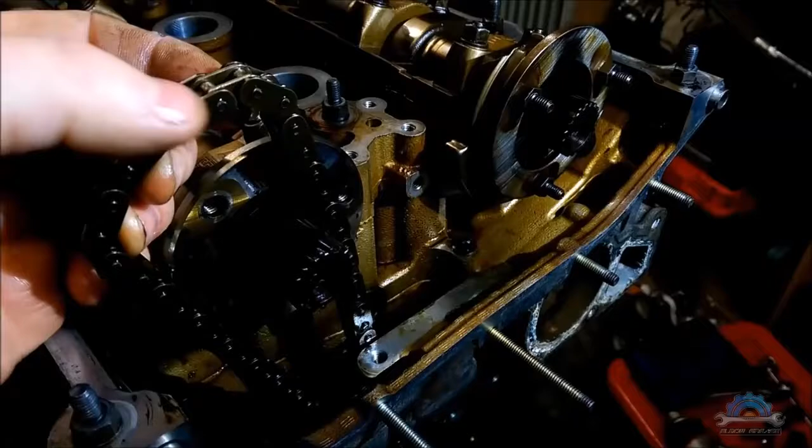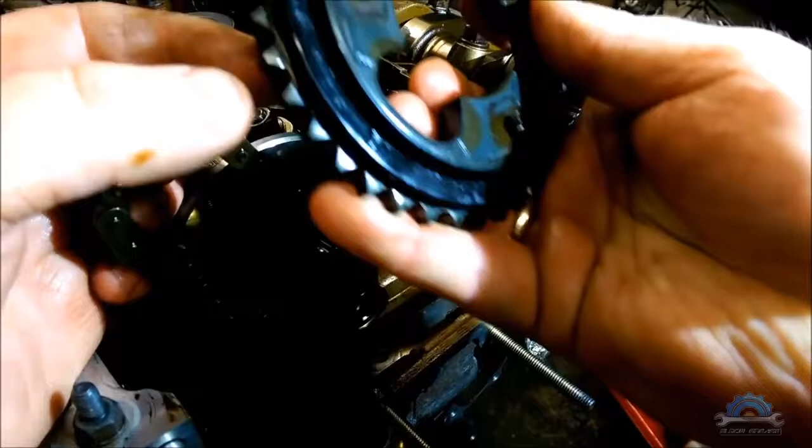Okay, when you put the timing chain on the camshaft, first sprocket is the big one with plastic inside, and there's an arrow on the side. This arrow needs to be flush with the left side of the cylinder head, so 90 degrees.

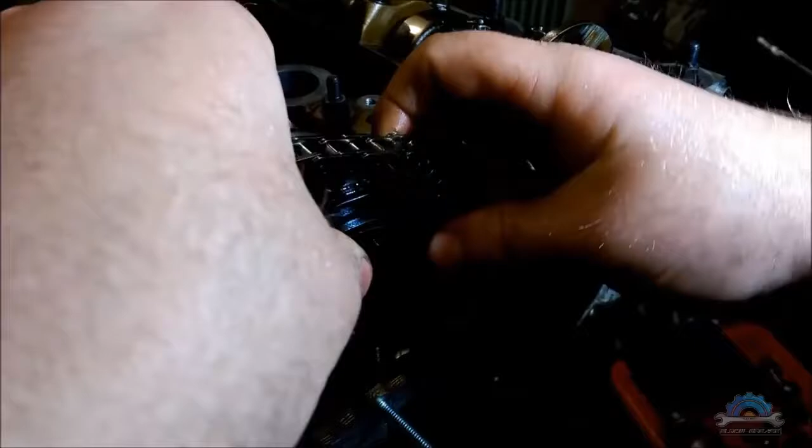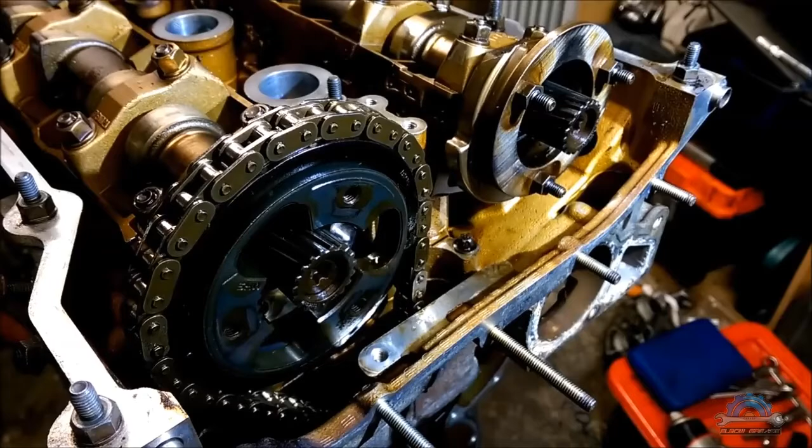But before you fiddle with the arrow, you need to make sure you have all the tools you need for the VANOS and for the timing. Actually, first tool is a camshaft locking tool. You need to lock two camshafts so they cannot move at all. Make sure this is tight.

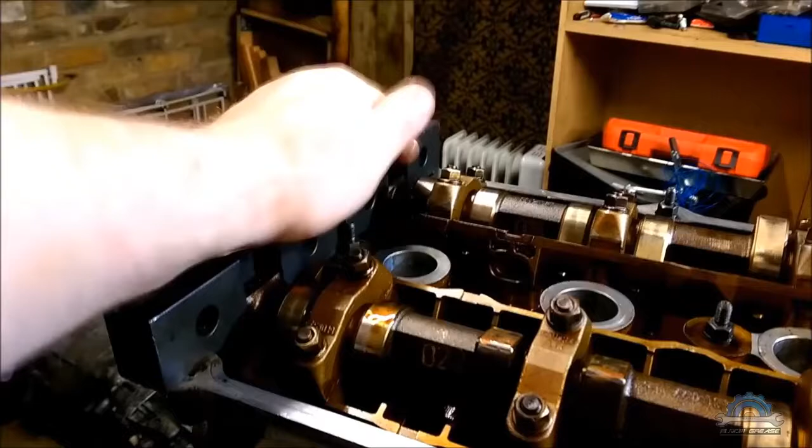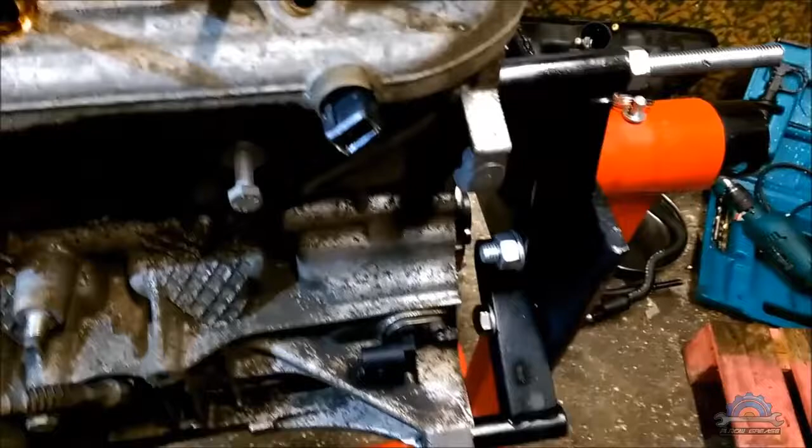It sits on the cylinder head, and then you can proceed with another tool, which is the crankshaft locking tool, which is that pin. But we have a problem here because we don't have a flywheel. And there's a hole for it, which goes through here and locks the flywheel. But the flywheel we have to take off because otherwise the engine won't be on the stand.

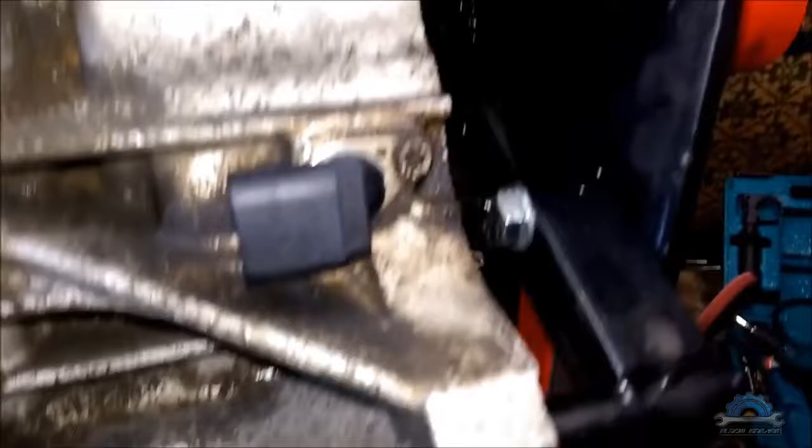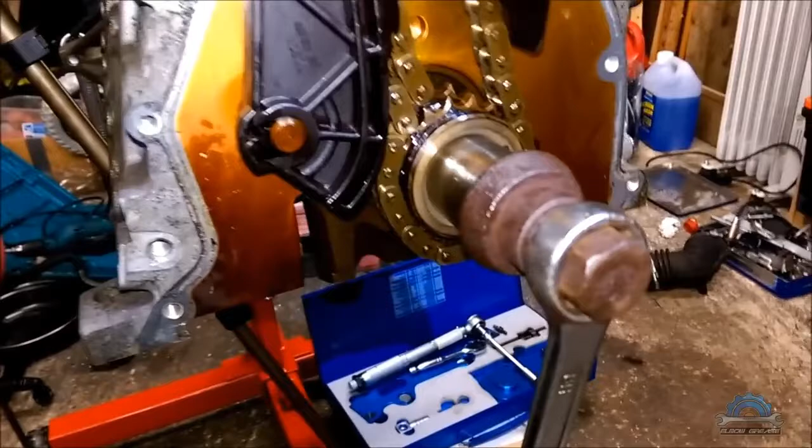So what you need to do, you need to have your timing cover. I'm not doing this with the timing cover because I want to show you more bits inside, but when you're doing this with your timing cover, I'm gonna show you in a minute what you need to do if you don't have a flywheel on the back. This is what you're gonna do.

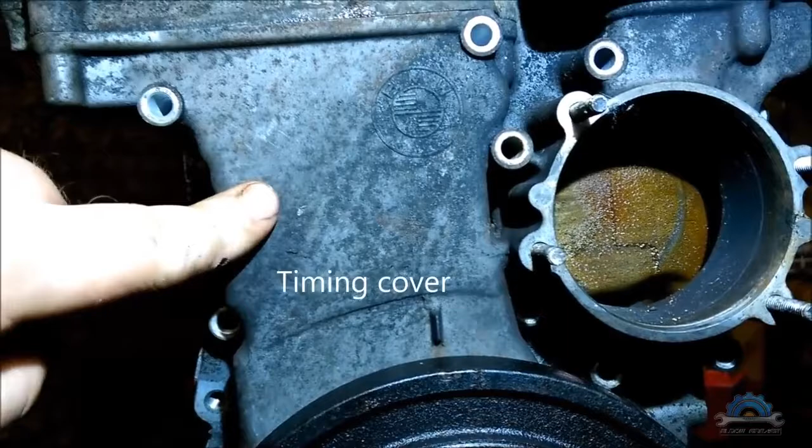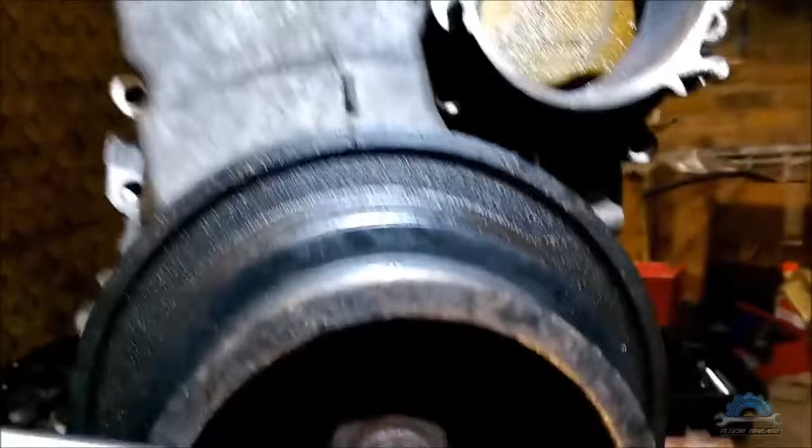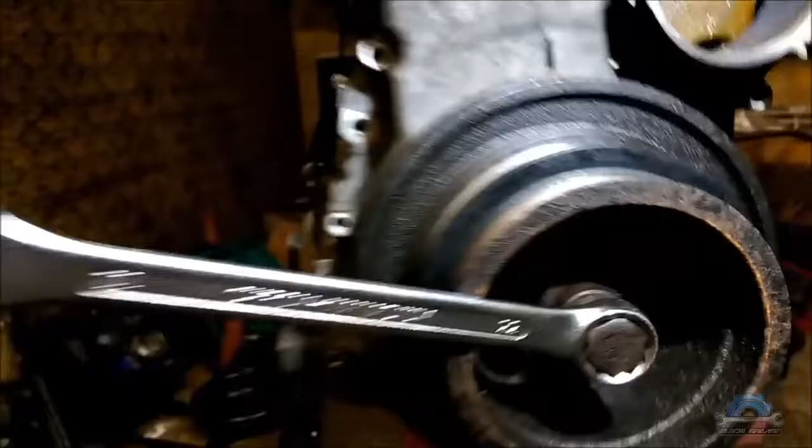You're gonna have your timing cover on in the first place anyway. I just did it to show you where the mark is. That's the mark on the timing cover. That's the mark on the crank pulley. So you need to make sure these are lined up. So that's gonna be top dead center, and then when you're at top dead center, you can align this arrow with this edge. So as you can see, I got my arrow flush with the cylinder head.

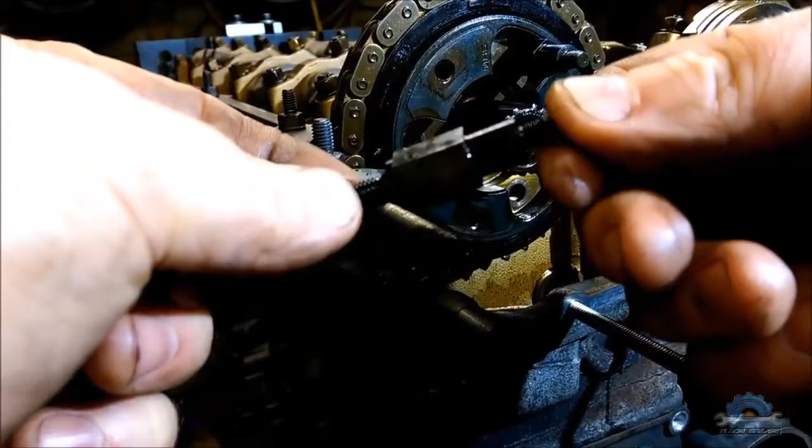So now you're gonna install 3 of these stop bolts. You can put them the wrong way because they are not symmetrical. That round thing needs to be facing out. And be careful not to drop anything inside. The best thing you can do is put some paper towels in here.

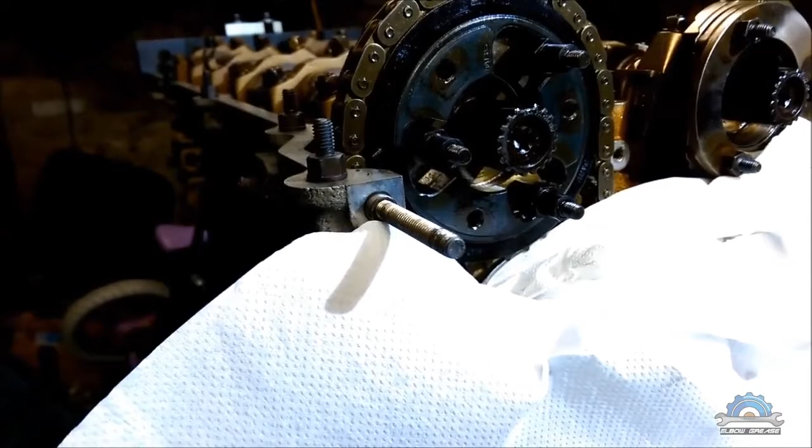So next thing you want to do is install your secondary chain tensioner. I said before you have to do all these 4 Torx, but no, you have to do 2 on the side, and these 2 holding the tensioner. So these 2 on the side first, and later these 2. Excuse me about that.

But now I'm gonna remove this one because it's holding the lower timing case, because I wanted to show you how it looks from inside, so I'm gonna remove it. And now what you need to do is install the secondary timing tensioner. It's 4 bolts.

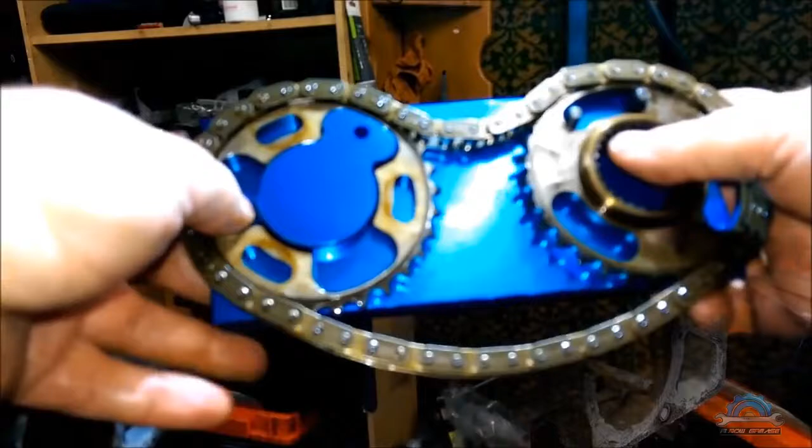To do that, you need one of the jigs from the VANOS tool, which can help you stretch and match the teeth on the sprockets. So as you see, you can't actually adjust it now, so you need to go back, and now it's ready. So what you do, you need to take the setup off the jig and put it on the camshafts.

Next, timing wheel, we can call it. It's gonna be this one. And then you're ready. Secondary timing chain. It's gonna be fiddly, but

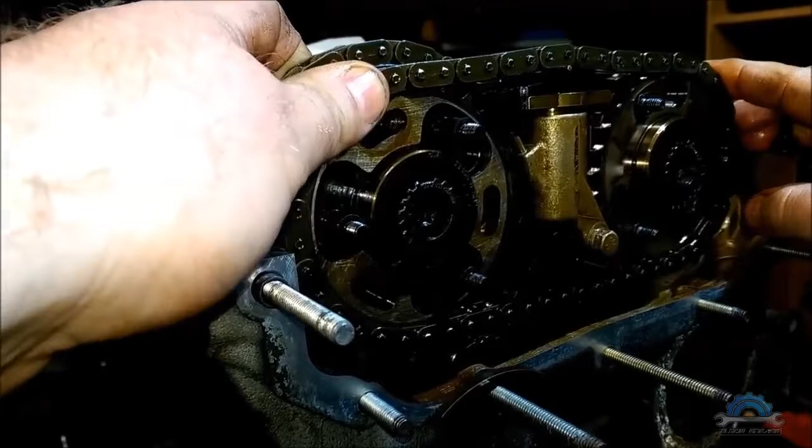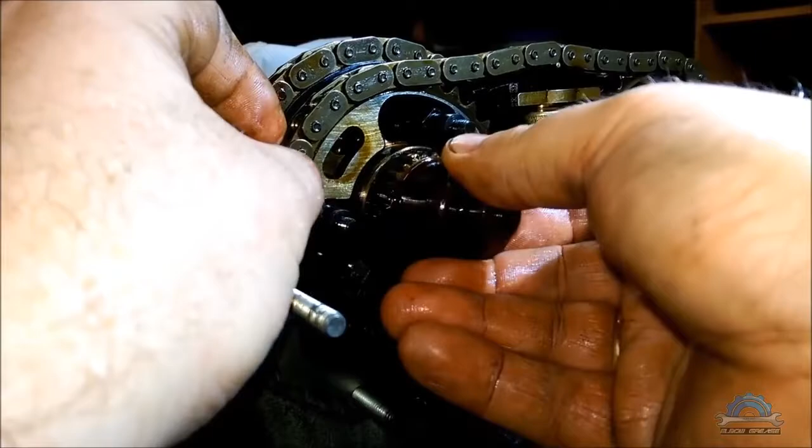each of the camshafts has a wider gap at some point. This gap must be close to the gap on the sprocket. So if it's not, you need to rotate them so they can fit, otherwise you're not going to be able to insert these splines. So they are close, so you will be able to do it. If not, you need to figure out how they're gonna go, and then you can insert them.

So as you can see, I have a good spot, and it's in. One is in. Okay, there's another one.

Okay, so I installed one of the tension plates, which is on the intake side. It says front, and 3 nuts. Now 3 Torx bolts. Not too tight, just finger tight, because that's gonna be torqued down later when you're gonna set up the timing.

And then spring plate, and timing wheel with the arrow facing the same cylinder position, I mean that edge of the cylinder head, same as the first wheel we did.

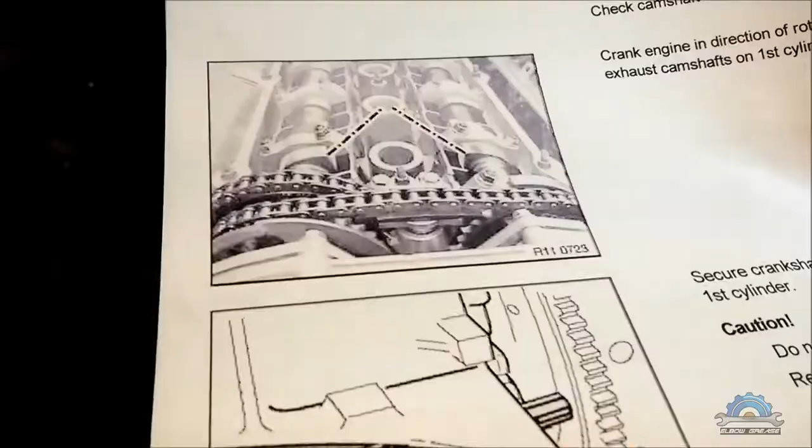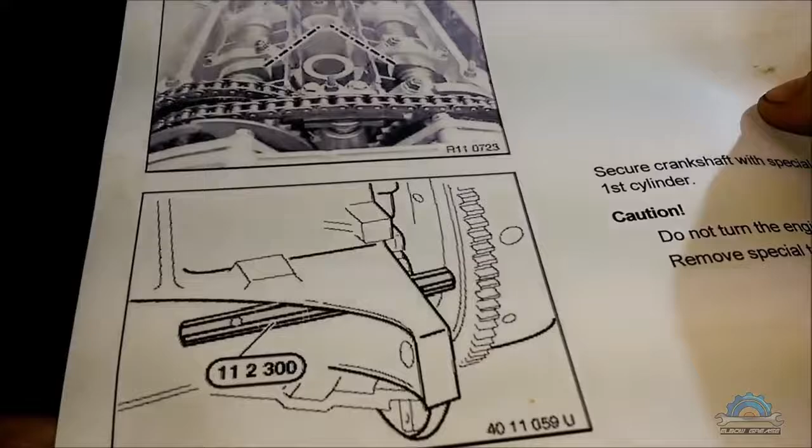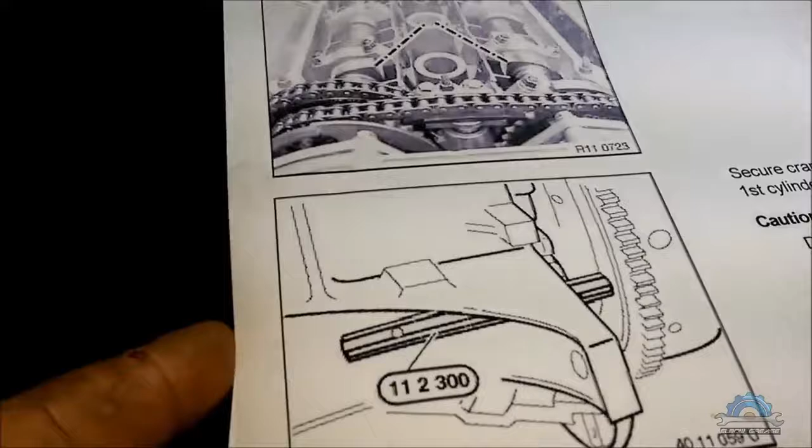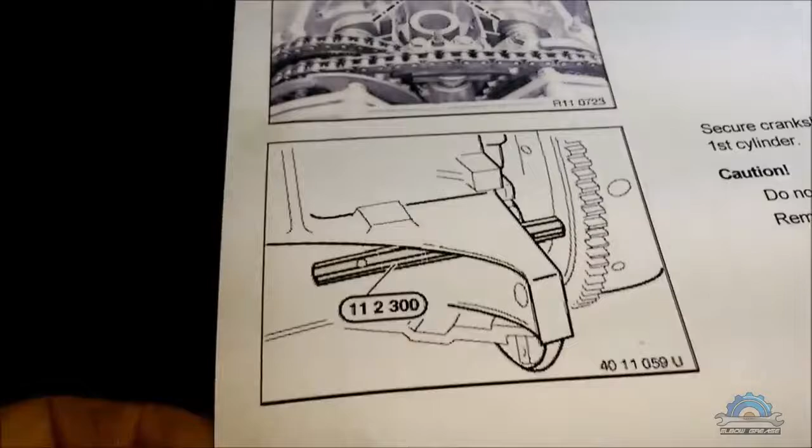Okay, so now I have a manual with me. I printed it out from the internet, step by step how to do timing adjustment, or camshaft adjustment, they say. You can print this out. I'm gonna give you a link for that. But this is how to adjust it when the VANOS and everything is on the cylinder head, so it doesn't show step by step how to put all the sprockets and bolts and everything on.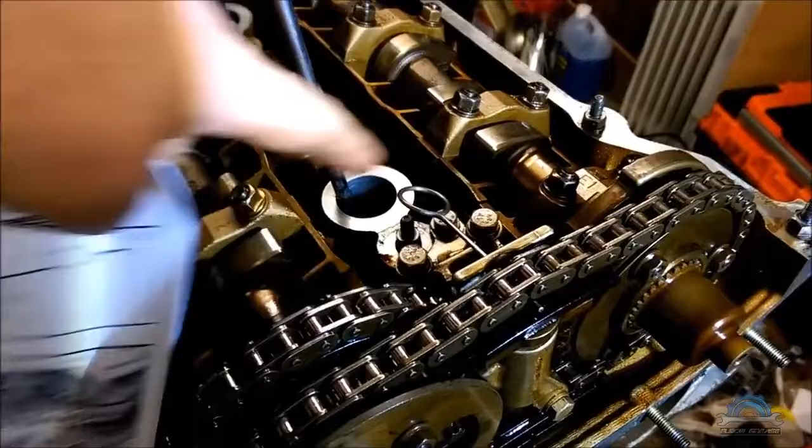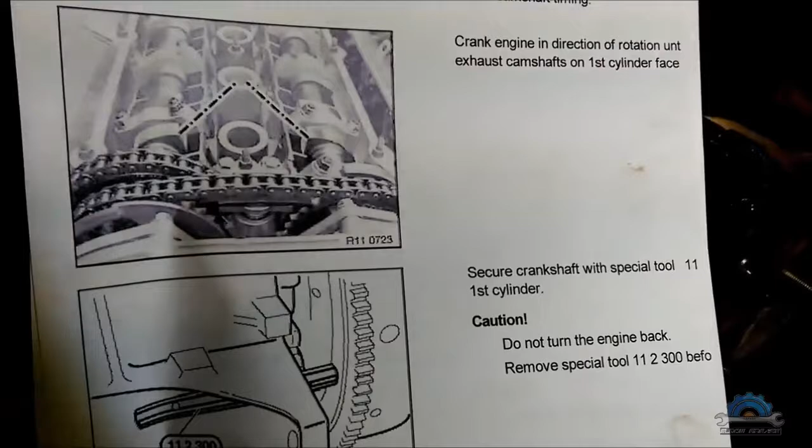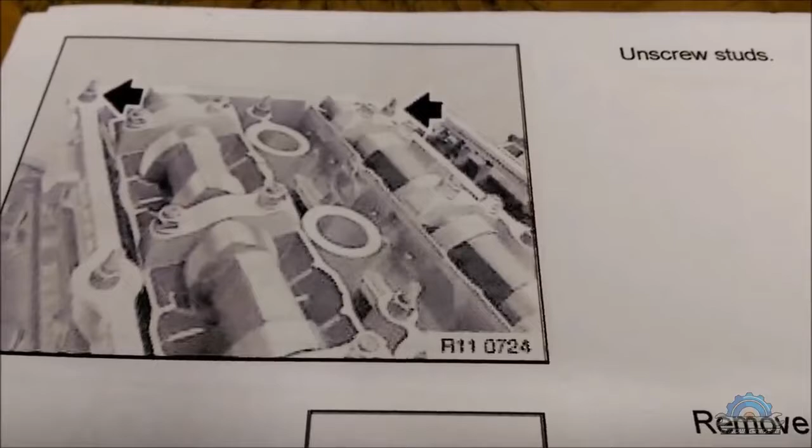Two lobes, intake and exhaust, facing each other. So that's what we have here, if you can see. Then lock the crankshaft with the flywheel. We don't have a flywheel, however we set top dead center with the crankshaft pulley. Now unscrew the studs on the end of the cylinder head. That's what I did before, and I also installed the camshaft locking tool.

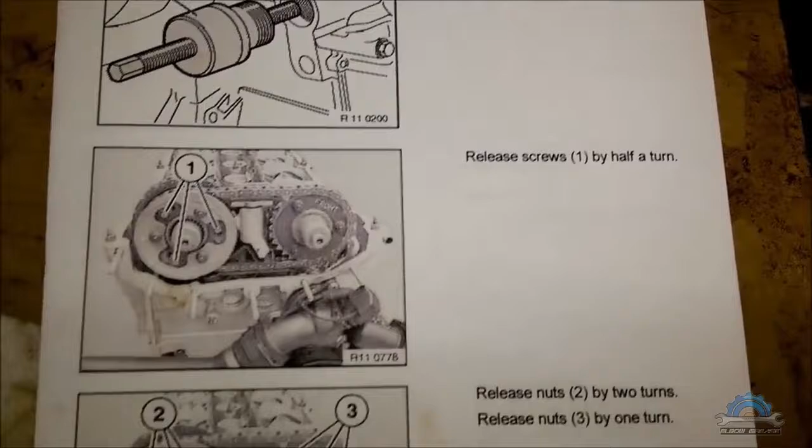Press down the secondary chain tensioner, cylinder for chain tensioner piston. Remove the cylinder for chain tensioner piston. That's what I did, and I inserted a tool from the VANOS kit already.

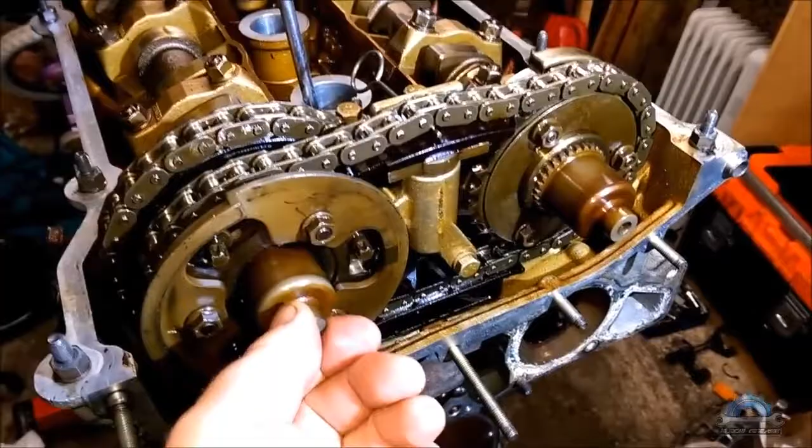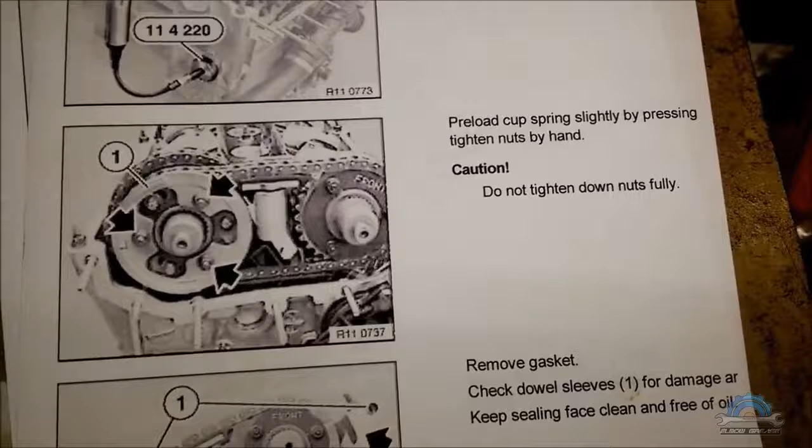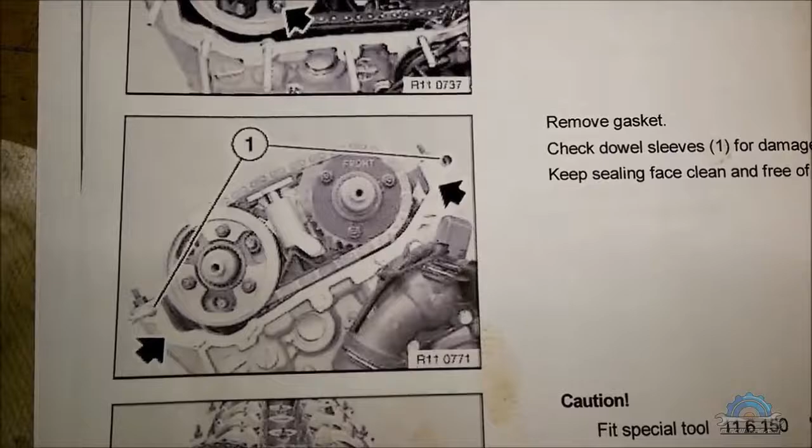It's shown here. We did this. It says release screws. We didn't release them. We didn't tighten them because I was putting back VANOS from scratch. Release nuts. Pull out the splines, they are out. Okay, preload the tensioner rail with special tool, adjusting screw with special tool.

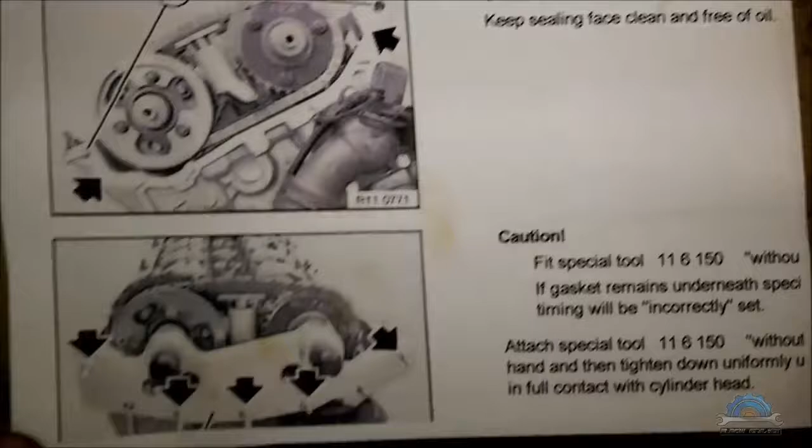Now, very important, remove the gasket, if you haven't done it before. So no gasket if you're doing the jig. Caution, fit special tool. That's the jig. That's what you're gonna do now. Okay, the jig is on, and screws. Very important thing.

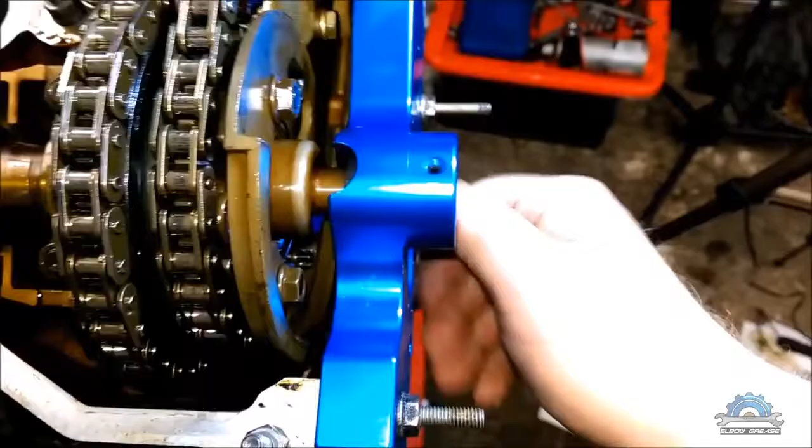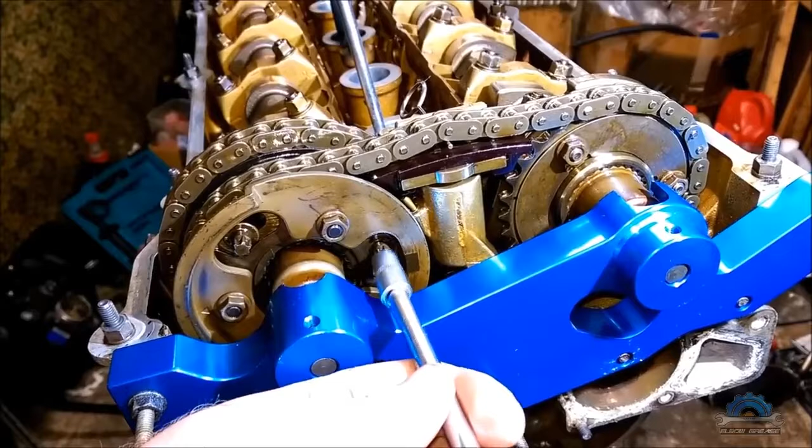When you're tightening this down, you can't have any gap between the splines and the tool. If you have a gap after tightening down, you can't proceed further. You have to go back. You have to pull the splines back so they're touching flush with the tool. It doesn't have to be very tight because you're gonna feel resistance straight away. You can finish with a spanner or socket if you like. Remember, no gasket between.

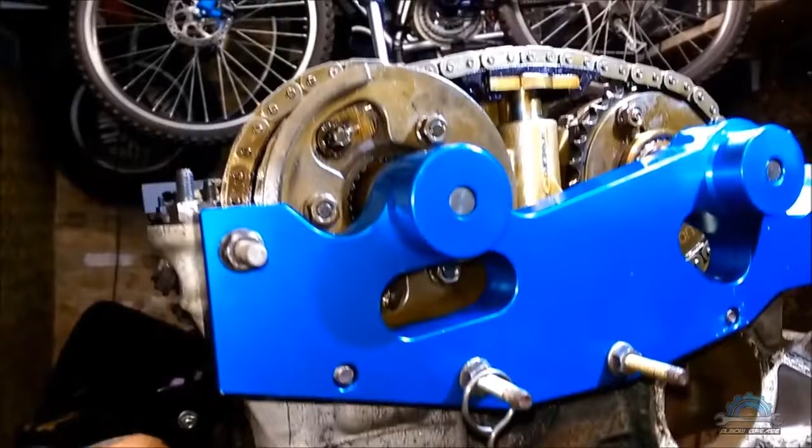When you have your jig on and it's secured, you can pull out the pin. And now, very important thing, I'm gonna show you. That's why I didn't put the timing cover on. If you can see, there's slack on the chain, and the tool is here. We don't have the special tool, which is very hard to find. If you find one, it's very expensive for the job. BMW says they need 0.7 Newton meter. That's actually nothing.

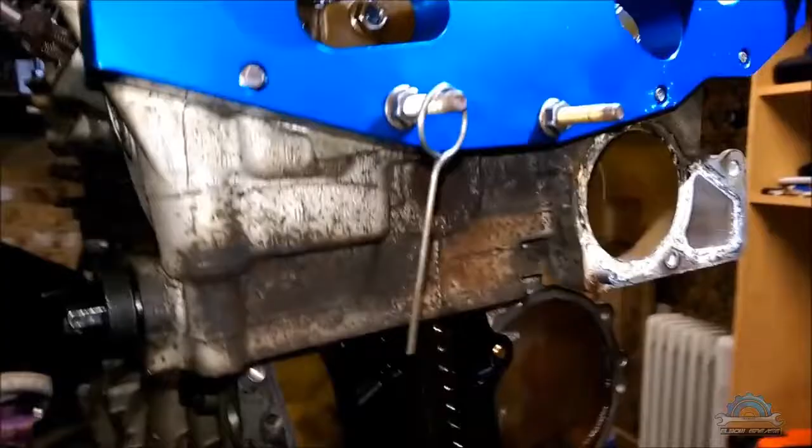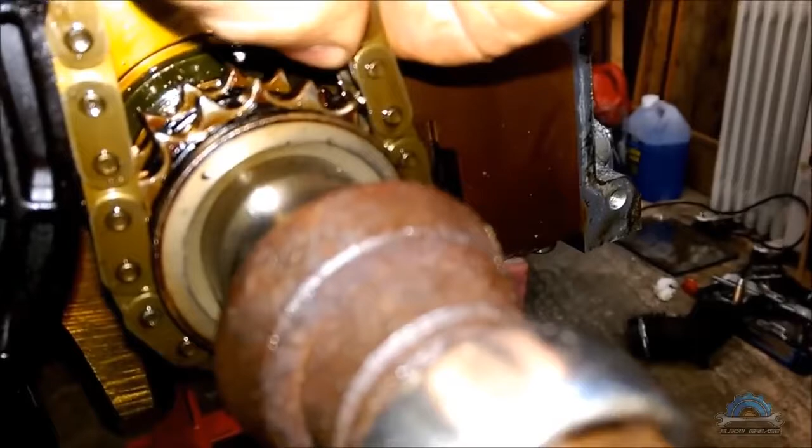I was trying this a few times on my M54 and it works good. What you need to do is just use your finger. If you rotate this by finger, you can see the slack is going off. We don't have tension in here, it's like preload tension. So when I turn this by hand, the slack goes away. So guys, my recommendation is just use your fingers, finger tight. As you can see, there's no slack.

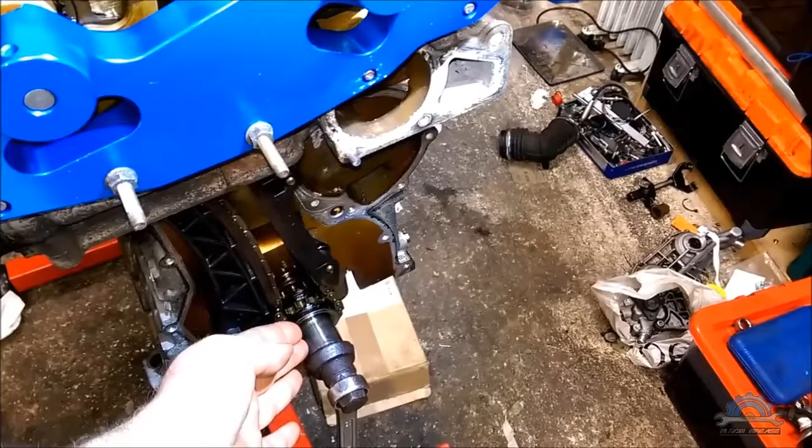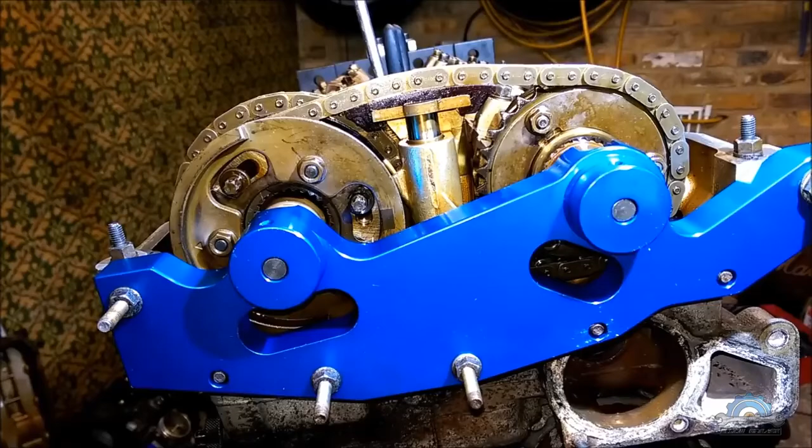The camshafts are locked. We have top dead center. You're gonna have a crank pulley in here anyway. If that crank pulley moves, you can stop, go back, adjust it again. That's how I did my M54. No problem with that. Computer showing each angle is fine. And now you need to tighten everything. We're gonna set this torque wrench for 10.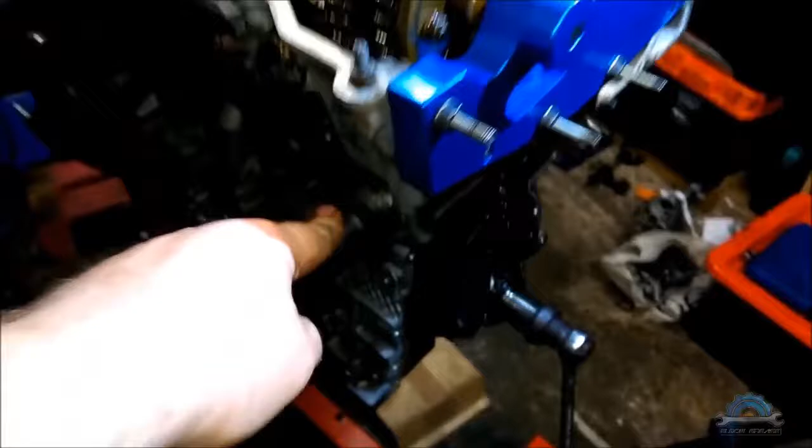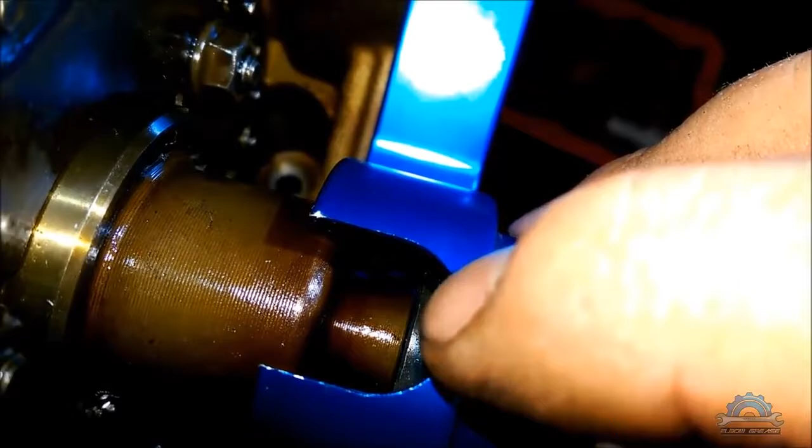Now you can remove the tension tool and you can install the tensioner itself. If you feel it's faulty, if it's compressed too much, you have to replace it with a new one. This requires 17 Newton meters. You just need to tighten this quite good.

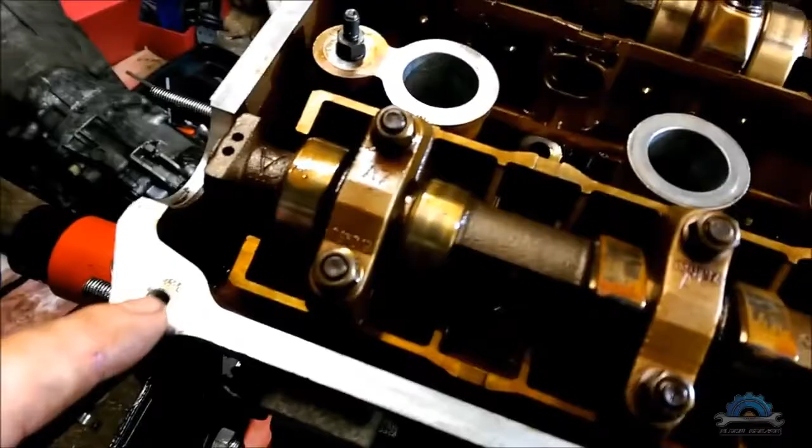And now you can remove the VANOS jig. You can double check if these don't have a gap. If they have a gap, you have to go back. Also, you can remove the timing locking tool and insert back the bolts you removed before. They are needed for the valve cover. And also after everything, remember you have a locking tool in the crankshaft. After you remove that, you just check if everything works.

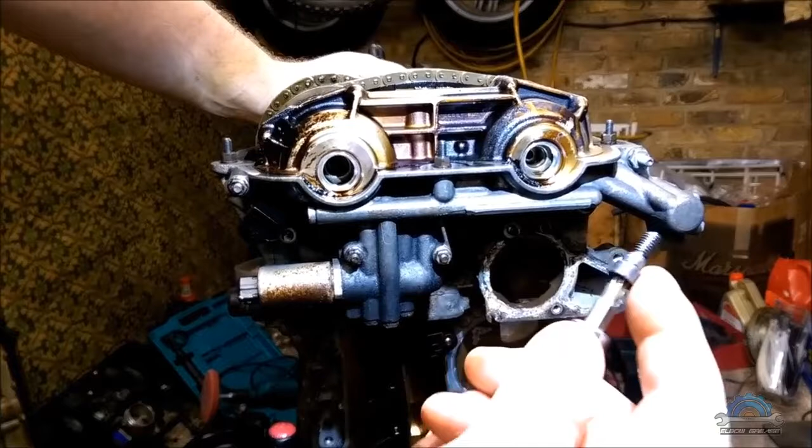Remember, this block was honed, so it has resistance. Slowly rotate everything to see if it's working. If you do one revolution, that's enough. You can do 2 revolutions. That means everything is fine. So after that, you can install a new gasket and put back the VANOS unit. When your VANOS is on, secured with nuts, turn these 2 bolts anti-clockwise to connect the pistons of the VANOS to the camshafts.

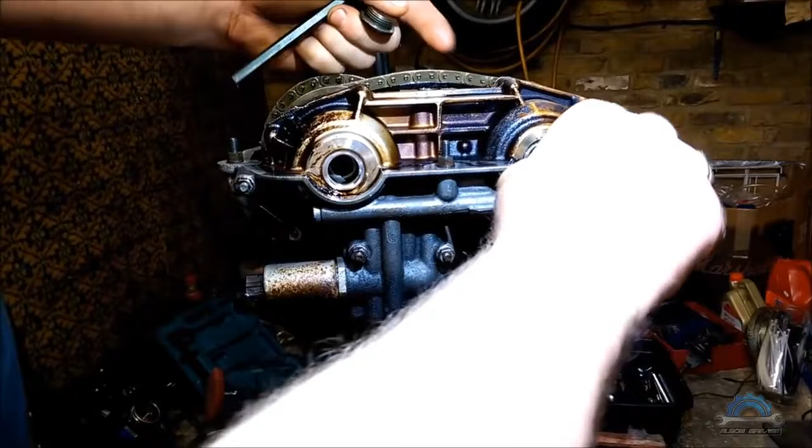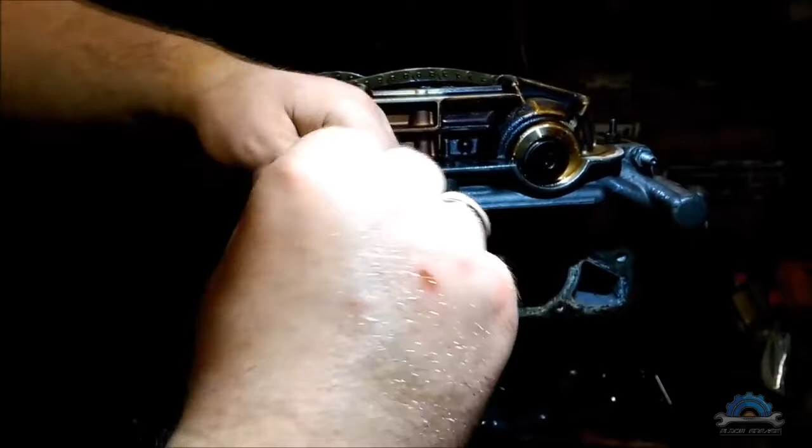These 2 bolts not too tight. There's no specific torque for that, I think, they just have a stop on the end, so if you feel resistance, that's it, they're not gonna go any further. So when you finish with the bolts, now you need to install 2 caps, where we did them before with the VANOS seals. And then finish with nut caps.

When your VANOS is on, you can do one more thing. Your kit should be supplied with this special adapter for this pressure line, which normally is fitted with oil, but you can test the VANOS with compressed air.

Okay guys, so after you install the VANOS and you tested it and it's working fine, you crank the crankshaft, everything rotating, nothing stops, everything's running smooth. You can start putting back your engine together. I'm not gonna be showing that because there's no point. There's many easy things you did probably before. Just reverse the process. I didn't install the cover, to show you how much tension to put.